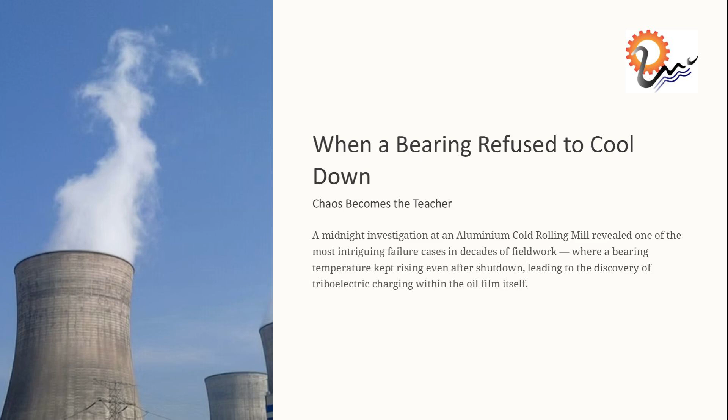In the world of engineering, sometimes chaos becomes the teacher. A midnight investigation at an aluminium cold rolling mill revealed a bearing temperature that refused to cool down, even after shutdown, leading to a discovery of triboelectric charging within the oil film itself.

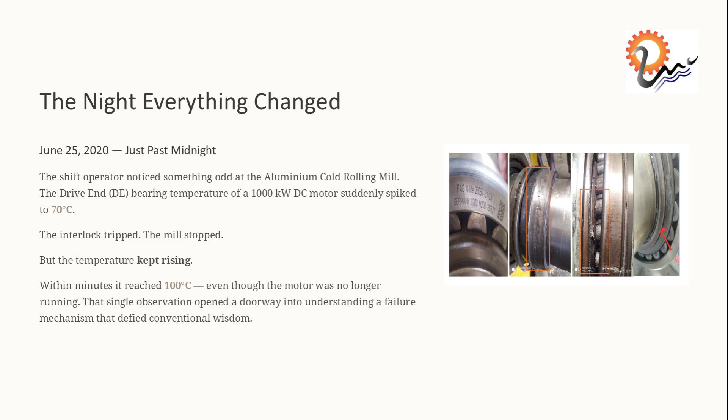On June 25, 2020, just past midnight, a shift operator noticed something odd at the aluminium cold rolling mill. The bearing temperature of a 1000 kilowatts DC motor suddenly spiked to 70 degrees Celsius, even though the motor was no longer running. This observation opened a doorway into understanding a failure mechanism that defied conventional wisdom.

When all usual explanations fail, the investigation begins. The team replaced the bearing, attempted a restart, but the bearing started smoking again. It was a pattern that looked like chaos, challenging the norms of typical mechanical failures. The chaotic pattern emerged as vibration waveforms were non-periodic and self-amplifying, a dance of disorder driven by multiple interacting energies.

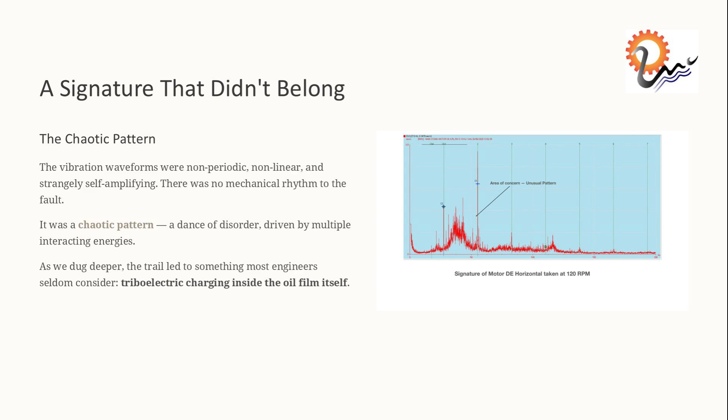This led to the discovery of triboelectric charging inside the oil film itself, a phenomenon engineers seldom consider. The unseen enemy was when oil turned into a capacitor. The slinger ring effect, charge accumulation, and plasma discharge were all contributing factors, creating electrostatic charge in the bearing oil housing system.

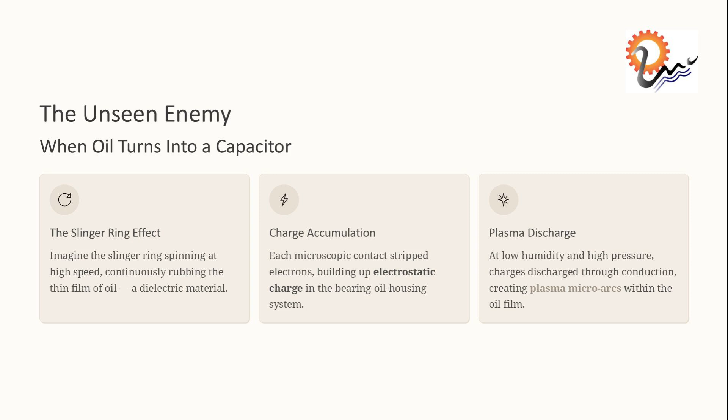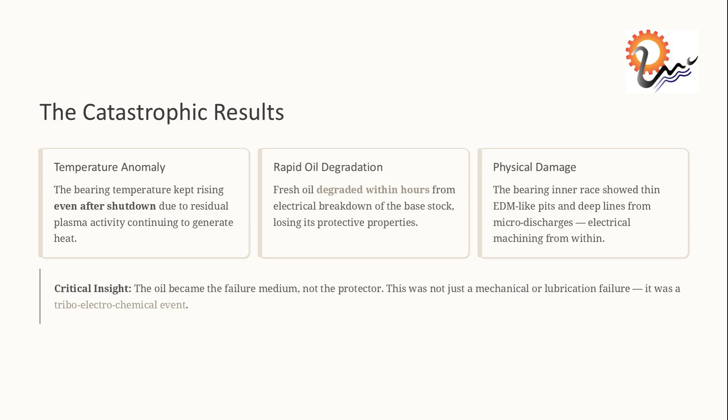The catastrophic results were evident as the bearing temperature kept rising even after shutdown due to residual plasma activity. Fresh oil degraded within hours, and the bearing inner race showed physical damage, revealing a triboelectrochemical event.

The failure sequence was revealed through friction initiation, charge accumulation, discharge events, plasma formation, oil breakdown, and EDM damage. Each step contributed to a cascading failure mode.

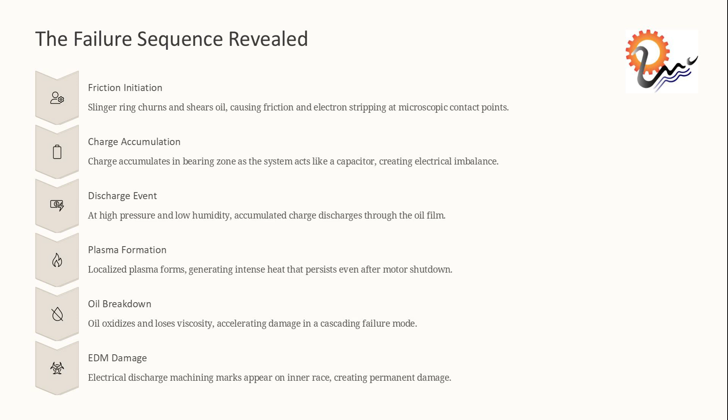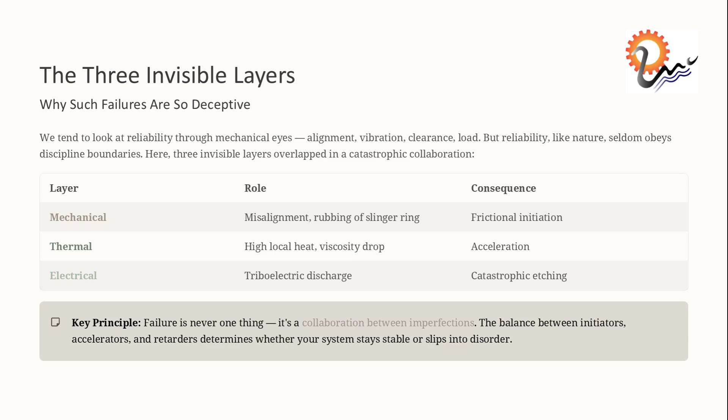Three invisible layers, mechanical, thermal, and electrical, overlapped in a catastrophic collaboration. Misalignment, high local heat, and triboelectric discharge led to catastrophic etching, showing how failure is a collaboration between imperfections.

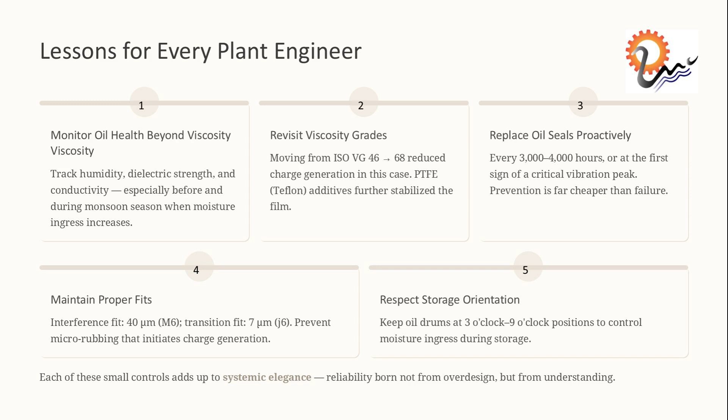Lessons for every plant engineer include monitoring oil health beyond viscosity, revisiting viscosity grades, replacing oil seals proactively, maintaining proper fits, and respecting storage orientation. Each lesson contributes to systemic elegance and reliability.

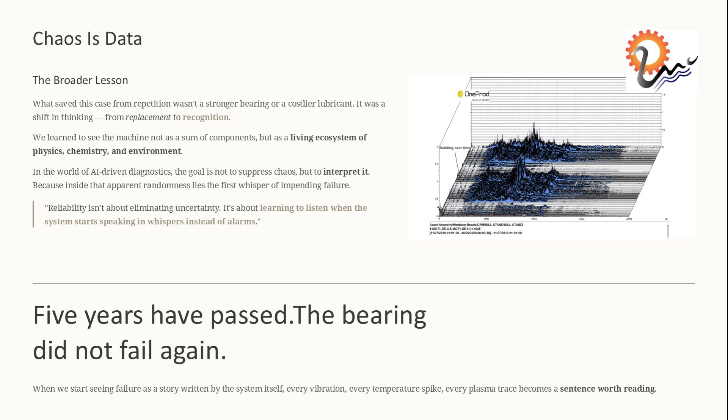Chaos is data, and the broader lesson is to interpret failure rather than suppress it. Five years have passed, and the bearing did not fail again, showing that understanding failure is key to preventing it.